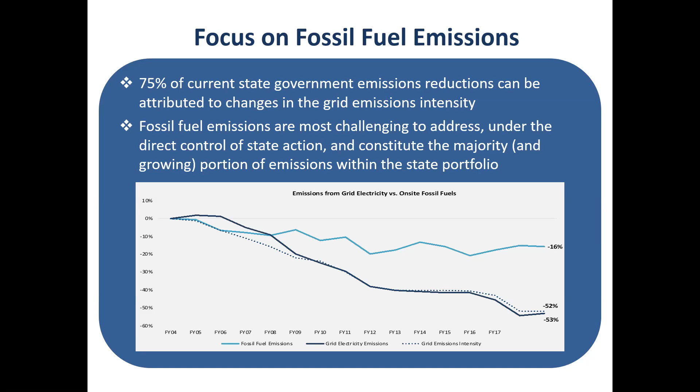And so this order really says what we need to focus on are the emissions that are the toughest, but also are the ones that we have directly under our control. This is the natural gas, the oil, the propane, the gasoline, the diesel that we use to fuel our power plants, our buildings, as well as our fleets. Next slide.

And so I think this is my last couple of slides. So we recognize and acknowledge that reducing emissions and meeting the targets that we have set are challenging for state facilities. We know that our state buildings are often situated in large facilities, often campus settings with central power plants, with fairly large and complex distribution systems. Many of our facilities operate 24/7. We have building ages even on the same campuses that are variable. Some of them built recently, some of them are 100 years old.

And we also know that in part because of DCAM action, a lot of the equipment that is now in place heating our campuses and our facilities is actually relatively new. We did a lot of work over the last 10, 15 years to bring that equipment up to snuff. And so we recognize that it's not the most cost-effective strategy to turn around and replace that equipment yet again.

Similarly, on the vehicle side, we know that our fleets are comprised primarily of pickup trucks and vans. We also know that often those vehicles are in our fleets for 8, 10, even 12 years. And so it's going to take some time to wait for those vehicles to be available as electric, as well as to then turn over the entire fleet. We also know that when we plan for things and incorporate long-term capital budgets into our programs and projects, there's a long-term horizon for this, several years at least, and oftentimes longer.

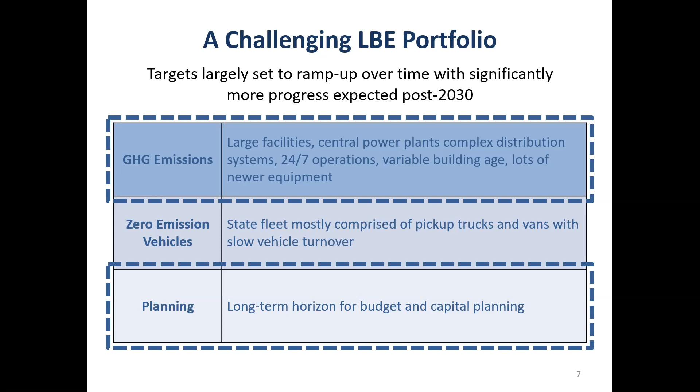Next slide. And I'll end here by just saying that we have been directed by the order, often in concert with DCAM, to develop guidelines and guidance documents for many of the sections in this order. We are working on those as we speak, and among the first set of guidelines that will be issued will be related to the new construction standard that we're going to talk about in a second. So stay tuned for those. There will be an opportunity for folks to look at those drafts and to provide some comments back to us on the guidelines that we are developing.

With that, I'm going to turn it over to Katie to launch into the Mass LEED Plus 2.0 standard for new construction. Take it away, Katie. Great, thanks, Eric. And as Eric mentioned, we are in the process of developing the guideline for this section. It's section 3 of the executive order.

So just to give you all a preview, those of you who are here today will get to see some of what we are working on in terms of that guideline document itself. We will be sharing that with all of our stakeholders, hopefully in the next couple of weeks, and would invite all of you to take a look at the guideline. Let us know if there are other questions or clarifications that would be helpful to include.

These guideline documents are a great tool for us to be able to update over time as new best practices, new technologies emerge. So we hope these will be really helpful, but also really dynamic and help guide the implementation of this new executive order. So I'm going to quickly recap what the requirements of the executive order state for both the new construction and existing building sections. And then specifically for the new construction, give you a sense of a little more detail and what we mean when we say things like eligible technologies. So Ryan, you can go ahead and go to the next slide.

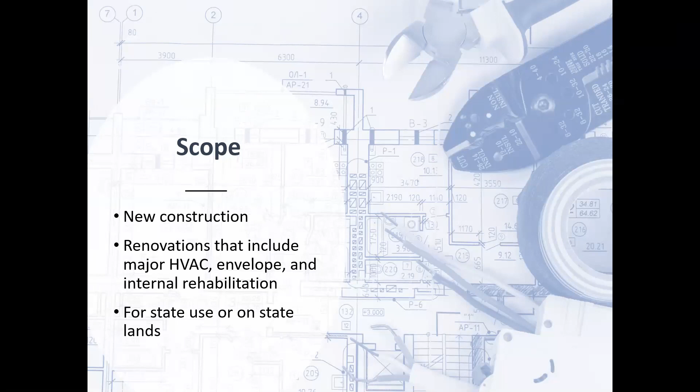So just a reminder that the Massachusetts LEED Plus 2.0 standard applies to both new construction and substantial renovation. We did work with DCAM to scope out what we meant by substantial, and that includes major HVAC, envelope, and internal rehabilitation. And also there's a caveat here that it's construction or renovation happening either for state use or located on state lands.

Next. So as the name would suggest, the previous new building standard did include LEED, and we have continued to keep LEED certification as a tenet of this new construction standard. There's now a minimum requirement to meet the silver level or higher. I think that will not be particularly challenging, as the majority of our state LEED buildings right now are gold or platinum. We recently had the 95th state LEED building added.

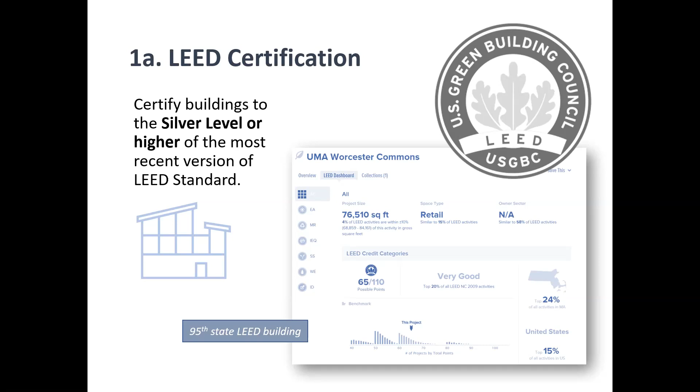We're doing a fun countdown to 100, but I think beyond the obvious energy-related accolades of LEED certification, there's a lot of value in a number of the non-energy prerequisites as well, including air quality and recycling. And so we felt that it was important to continue to use the LEED certification as part of the requirements for new construction. Next.

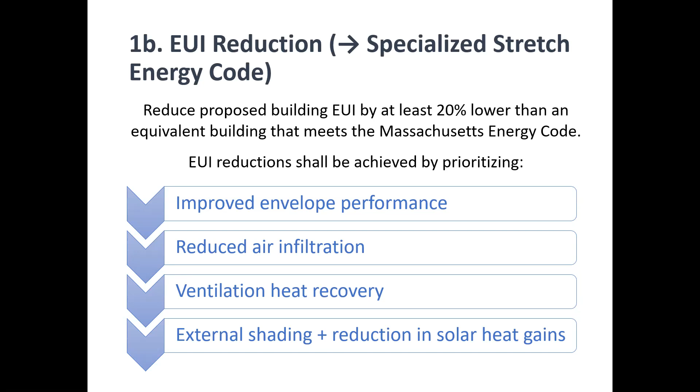So again, this is somewhat similar to the original Mass LEED Plus standard in that there is a requirement that building EUI be 20% better than the current energy code. There are some additional details that the EUI reduction should really focus on the building efficiency rather than strictly renewables. Because it's new construction, this is really the prime opportunity to address envelope and thermal related aspects.

So this is nothing new, but something that is new, Ryan, if you could click through, is the new 2021 climate bill that was signed in March does include a directive that DOER is going to develop a specialized stretch energy code. From our initial discussions with folks at DOER, it sounds like that energy code will have a similar metric to EUI, but really be focused on thermal efficiency of buildings. They will be promulgating that by the end of 2022. I think it's within 18 months of the signature date of that climate bill, and it will be an appendix to the Massachusetts Building Code.

So once that is promulgated, that specialized stretch energy code will replace this EUI requirement in the executive order. That is stated in the order itself. We will obviously update the guideline to reflect that change, but just wanted to let folks know that that's what's coming down the pike.

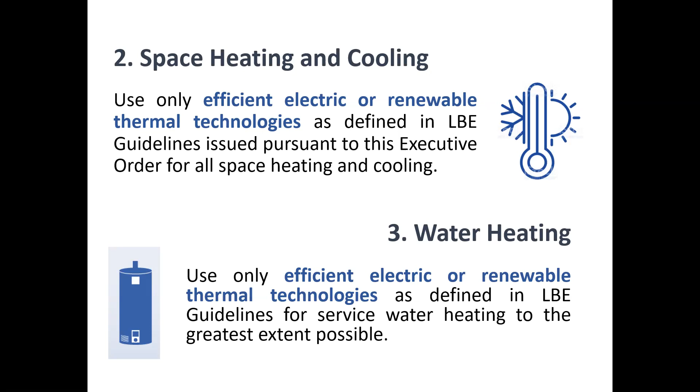Next slide. So as we know, some of the main systems in buildings that we want to focus on decarbonizing, especially in new construction when we have a prime opportunity to do so, relate to the space heating and cooling and water heating. There is language in the order stating that new construction and substantial renovations have to use efficient electric or renewable thermal technologies. And we've had continuous discussions with DCAM and others at DOER and have scoped out what we would like to propose. And Ryan, if you could click.

Right now, we are suggesting that prioritizing electrified or non-combustion solutions should be the primary objective, and that those equipment systems should meet the alternative energy portfolio standard specifications for that equipment. And then in cases where those technologies are not feasible for the project, there is an opportunity to seek other APS eligible technologies for renewable thermal, including woody biomass, biofuel, biogas, and compost heat exchange.

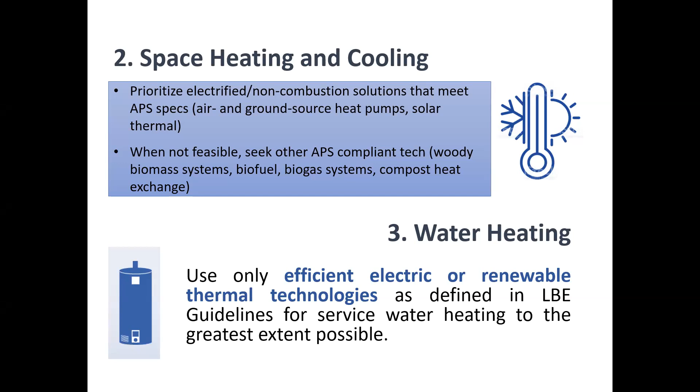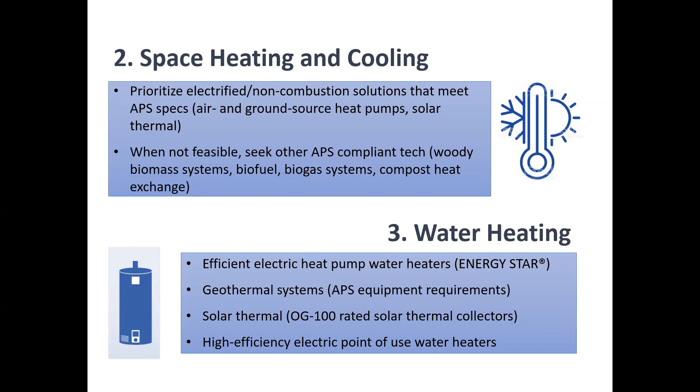For water heating systems in buildings, we are suggesting that for new construction, there either be incorporation of efficient electric heat pump water heaters, geothermal, solar thermal, and in certain cases where those centralized water heating systems are not applicable or appropriate, that the focus be put on high efficiency electric point of use water heaters. Next.

So EUI target setting, I think, is a really key focus area for DCAM and something that they have been working very closely on their projects to ensure that when a building is being designed, that there is a really aggressive EUI target that sort of represents best in class for that building type. So we've codified that in the executive order. And Ryan, if you could click, please.

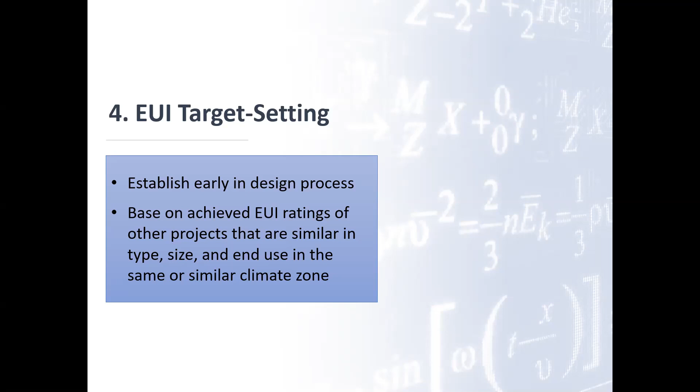One thing we've added to our draft guideline is that something like the EUI target should be set really early in the design process, and that EUI be based on projects that are very similar in terms of type, size, in the same climate zone, and that there be transparency about how that EUI target was calculated, just so that there is some sort of background information and sort of illustrating how informed that EUI target was.

Next. There is a continued focus on on-site renewables and maximizing those whenever possible. In cases where it's not possible, the executive order does state that projects can seek an exemption in that case, but that they must still design the building to be solar ready, which is fully defined in the Massachusetts Building Energy Code. It includes things like running conduit and ensuring that the building's electrical systems are going to be able to handle solar in the future. Ryan, if you could click, please.

So really the ideal timing for on-site renewables is going to be during or right after construction. We would recommend an emphasis on solar. It's sort of the best and most natural fit, particularly when you're doing parking areas and rooftops in these new buildings. It's the best time to really get the solar PV installed. As I said, when it's not fiscally or technically feasible for that project, at least seeking to design to be solar ready. And in addition, ensuring that state partners are aware of and adhere to the EPA best practices for making claims about that renewable energy.

Next. So climate resilience is an area of growing importance across the state portfolio. Both DCAM and the Executive Office of Energy and Environmental Affairs, as well as many other departments and agencies across state government, have really brought this to the forefront. It involves preparing the physical assets and energy systems to account for projected changes due to climate change and really position the Commonwealth to address those hazards and really reduce the risks.

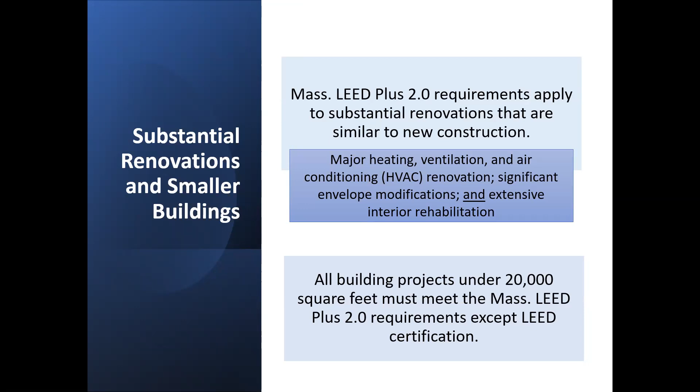Lastly, there is a provision in the Mass LEED Plus 2.0 standard that qualifies these standards as also applicable to substantial renovations. Recapping how we've tentatively defined that with DCAM, projects under a certain size threshold, in this case 20,000 square feet, have to meet all of the requirements. They're not required to meet the LEED certification requirement, but it is still strongly recommended, and when possible should still be included as an aspiration as part of the project design process.

And then at the end, there are a number of additional directives as part of the standard. These are not requirements, but they're suggested best practices when possible.

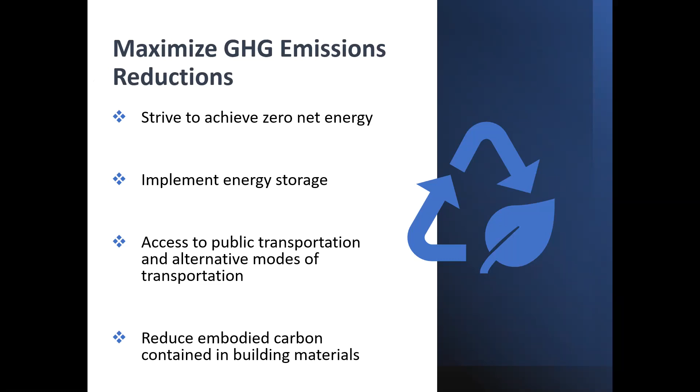Right now in the draft guideline document, we've created a few clarifying items and suggestions for what we mean by each of these additional directives when we're talking about zero net energy. It's important to note that as part of that specialized stretch energy code that will be developed and promulgated by DOER, they will be defining a zero net energy building per the Massachusetts Building Code. So we will be updating our guideline to reflect that definition, but we want to be transparent about the renewable energy attributes and claims that can be made. I think the underlying spirit of zero net energy is to optimize the efficiency of the building while also maximizing the energy from renewable resources. So that's really what we mean here. It's not necessarily striving to achieve a specific certification. It's really more the underlying premise of the zero net energy concept.

When it comes to energy storage, I think it's often a very natural pairing with renewable generation, given the number of incentive programs right now, and as the grid gets greener and greener, there's going to be a bigger need for battery energy storage to help offset some of those peaks. So when it makes sense for the site, we would encourage implementation of energy storage.

As part of the site selection process, if that is something applicable for a project, considering things like access to public transportation and other modes of transportation, whether that's biking or pedestrians, should be a key part of evaluating the site.

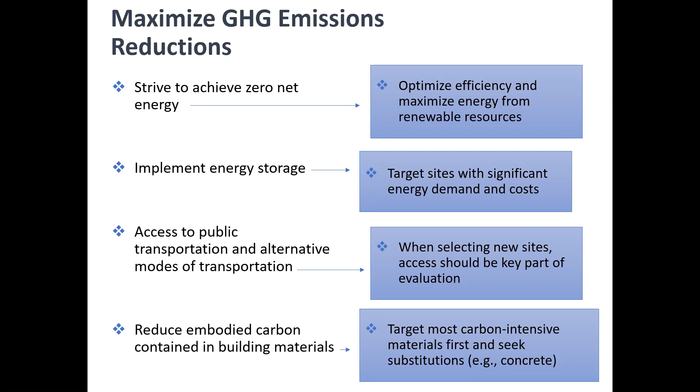Lastly, this is an area that DOER will be exploring further. Per the executive order, we have a directive to conduct a study to do a deeper dive on this, but seeking to reduce embodied carbon in building materials whenever possible. We have some initial technologies out there right now, and when possible, those should be included in projects, but more to come on that in the future.

Now we'll talk a little bit about existing buildings. This is not a section that we have really done a deeper dive in developing guidance for, so this is really going to be more a summary of the requirements that exist in the order, with the exception of biofuels. When we get there, I will pause, and you'll see that little blue box again to indicate that's the preliminary guidance we're going to put forth for your comments.

There are a number of directives, and this is one of the primary focus points of the existing building section, which is section 4 of the executive order: when planning or doing projects that affect energy use, it's really taking the overarching objectives and goals of this executive order into great consideration. So either reducing or eliminating on-site fossil fuel combustion, optimizing building performance, monitoring building energy performance over time to ensure those buildings are continuing to meet their original objectives, installing the highest efficiency equipment possible, and incorporating energy performance into leasing decisions as well, since we know it's not the vast majority of state square footage, but it is still a piece of it.

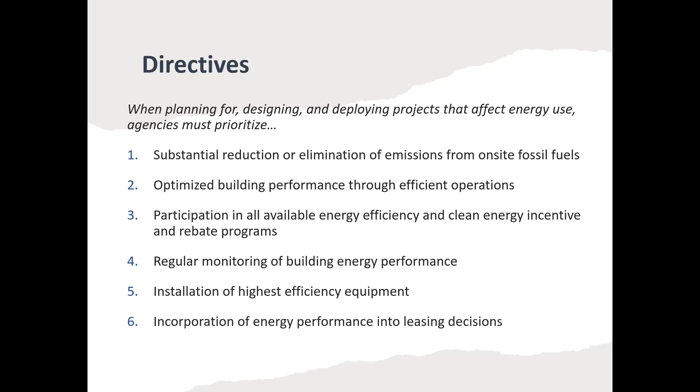So planning—I'll let Sarah speak to some of this in more detail, because really this is DCAM's bailiwick. Utilizing the energy data, we have quite a wealth of it at this point, and as the CEI real-time metering program continues to roll out and expand, we will have more and more data at our fingertips, which is great, and we're always finding new ways to analyze and leverage that to inform projects in progress.

As we said, including things like greenhouse gas emission reductions, decarbonization, clean energy in all types of equipment replacement and capital and master planning. Lastly, DCAM, per the executive order, is directed to conduct periodic analyses, some on a 5-year timetable, some on a 10-year timetable, just to assess where in the portfolio emissions are still in need of extra support and how we can drive that down.

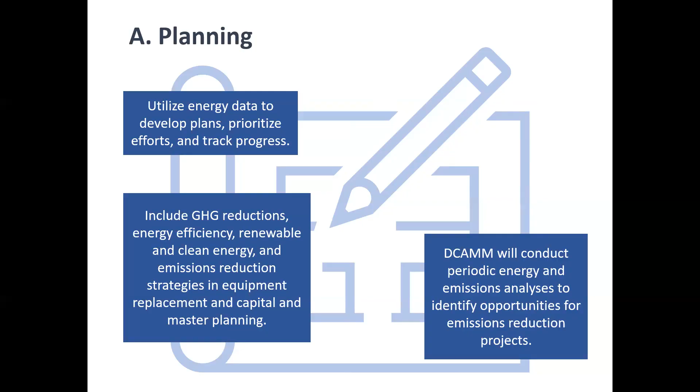Renovations and comprehensive energy projects is a similar theme here, encompassing the spirit of really seeking to decarbonize whenever possible. As Eric spoke to earlier, the existing building portfolio is really in need of attention to meet these 2025 through 2050 goals, seeking out envelope improvements, reducing EUI, increasing the amount of renewable energy and energy storage, and maximizing resiliency. These are all going to be continually important aspects of our building portfolio. The order is weaving all of this into various aspects of our existing building activity.

In terms of operations, we will continue to track energy performance and seek to reduce building energy use through operational efficiencies. Similar to what the previous order did, there's a directive to continue to provide training and professional development, and that is something that DCAMM and MAFMA already do to a great degree and very effectively. This executive order just codifies the great work that's already happening and enables them to continue it going forward.

Heating oil, as Eric alluded to—this is one where there's an effective date of July 1st, so there will be a guideline document on heating oil as well, coming out around the same time as that new construction guideline. We will be accepting comments. Basically, for sites using heating oil, there's going to be a new B10 biofuel blend minimum requirement. The B100 portion of that fuel must meet the APS requirements. We'll have more details and information in the guideline, and would love to get your feedback on this, particularly those of you that still have some measure of heating oil use at your sites, just to make sure the information and guidance we're providing is helpful and helps you address any questions you might get.

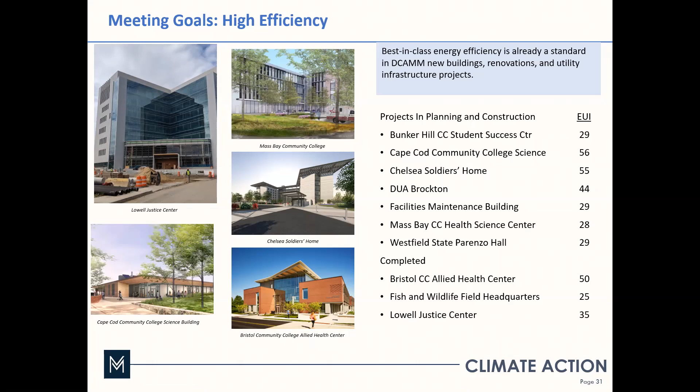What we find is that some of the national data sets aren't that useful because they include older buildings which aren't as aggressive. A caution, if anybody on the call is not working with DCAMM, in particular, the baselines for the AIA 2030 targets are much higher, some of which don't meet mass energy codes, so a little caution there.

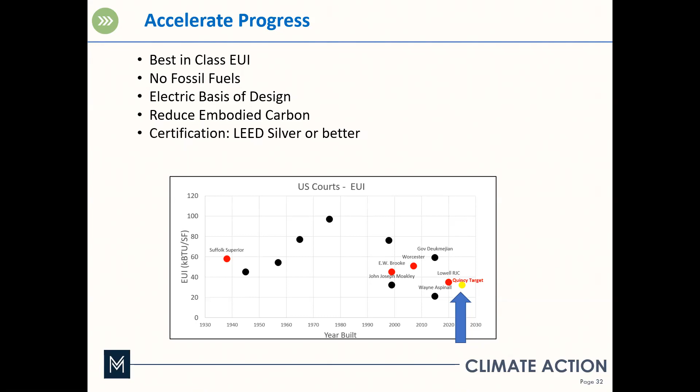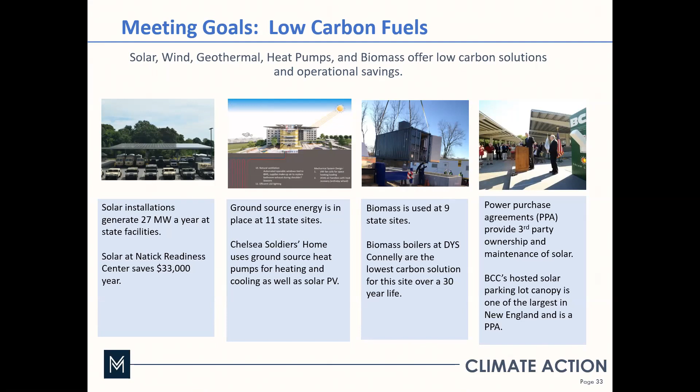Here are some of our projects where we've used low carbon fuels, with a caution: Natick Readiness Center generates solar energy but sells the renewable energy attributes, at a savings to the facility. Chelsea's Soldiers Home uses ground source heat pumps and will host solar PV. There's biomass at 9 state sites, with a new biomass boiler at DYS Connelly. The power purchase agreement for hosted solar at Bristol Community College is one of the largest solar parking lot canopies in New England. All of these have offered low carbon solutions to the region and operational savings to the agency.

Of course, existing buildings is the real challenge - I mean, it's all challenging, right? But existing buildings is really a challenge, and the order is more directive than the prior order in this area. In particular, two areas: we'll be asked to have our teams evaluate the building envelope and upgrade it where feasible, in addition to targeting a low energy use intensity, but also to evaluate low carbon solutions for heating, ventilation, and air conditioning.

Now, evaluating the envelope - the rationale here is simple. The envelope is a driver of energy efficiency, and if we're going to change out our HVAC systems to be low carbon, the smaller we can make them, the better, in terms of load. They are less expensive to build and to operate.

In terms of evaluating low carbon HVAC, that has to happen really early in any project, and we'll be pushing our teams. An aside is that as we're moving to incorporate this into our RFPs, as well as our new house doctor relationships, we're meeting with house doctors to talk with them about this expectation. It's been implied throughout Eric's and Casey, Katie's comments,

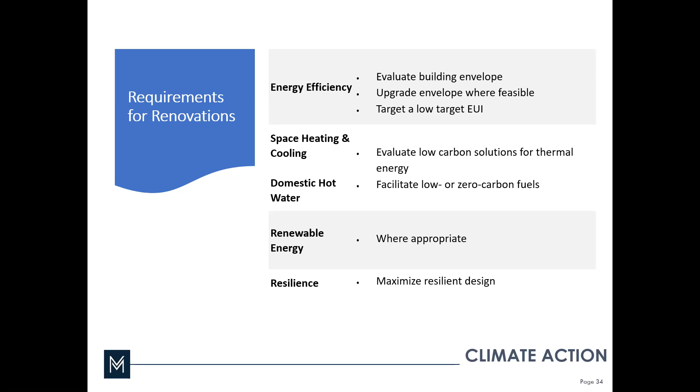but bears repeating that one of the assumptions we're all operating under is that the electric grid in the region has been getting cleaner for sure, and will continue to get cleaner and lower carbon. So we're going to be moving largely to electrification.

Many of you on this call know that there are a number of decarbonization studies that are either almost complete or in process at the UMass facilities, as well as the Salem State North Campus, and an integration of a decarbonization plan with the master plan at Mass Maritime. The executive order does have planning requirements, as Katie mentioned. And at DCAMM, we're looking to include decarbonization into master plans, facility conditions assessments, and critical infrastructure planning.

And the results of all of these studies show that we need to move to a low temperature water distribution, which largely accommodates heat pump technology. And then to do that successfully, we need to make our buildings ready with higher efficiency, appropriate heat delivery and air conditioning delivery equipment, and then to transition to electric infrastructure. And we're also looking to think about how do we future-proof our facilities, even if we can't fully undertake the decarbonization in a given project.

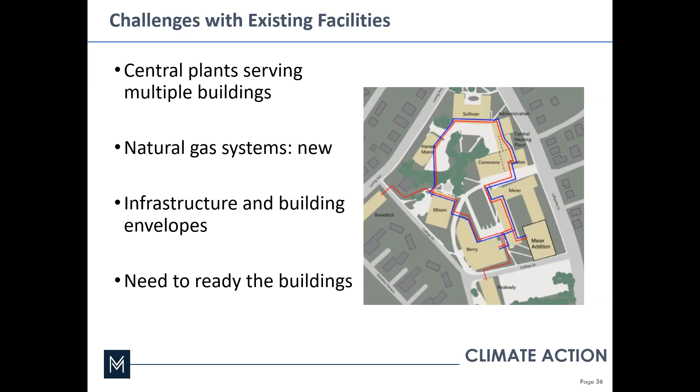Okay, turn it back to you, Katie or Eric. All right, so I think it's just back to me quickly.

Just a couple of closing thoughts, and then we want to leave time for questions, clarifications, or other points that folks want to make. The next couple of slides are just our initial thoughts on helping folks to think about how do we get off our chairs and start thinking about this now, while these longer planning efforts for full decarbonization are taking place in a longer time frame. So let's go to the next slide.

So I think we want to just start by reminding folks that the reason we have such a big focus on buildings in this executive order is some of the data here that shows that buildings comprise well over 3/4, 85% actually, of the state's emissions that come from fossil fuels. So that means obviously that if we're going to achieve these goals in any measure, we have to be looking at our building portfolio and the building sector within the state system.

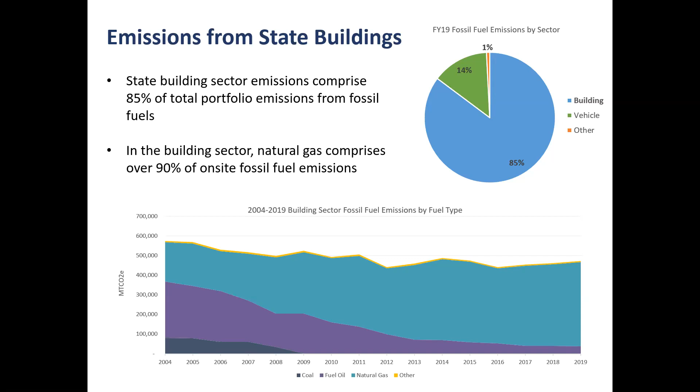Additionally, as Sarah mentioned, there has been a huge effort to transition to natural gas as what we used to call the transition fuel a number of years ago. And so when we look at our on-site fossil fuel emissions in the building sector, 90% of those are coming from natural gas. So when you hear efforts at DCAMM and in other places focusing on converting away from natural gas in our building sectors used for heating, this is exactly why the conversation almost immediately goes to that fuel and to this sector.

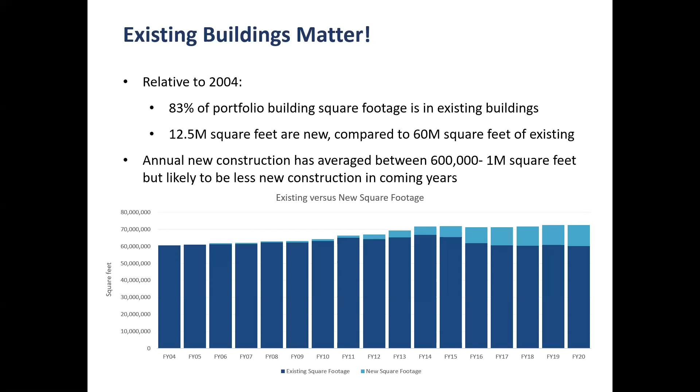We also recognize that a lot of the new construction that's happened over the last number of years is likely to slow down as the state focuses on managing and taking care of its existing square footage, and puts a bit of a hold on new construction, although there definitely are some new buildings coming online. But we certainly don't think that this will happen at the same pace over the next 10, 15, 20 years.

And so again, here's some thoughts. There's no magic bullet to this. And so we want to help folks think about this in a way that doesn't overwhelm you from the get-go, because this can be overwhelming when we talk about achieving the goals that we want to achieve. So first, we just want to remind folks that decarbonization is not happening all at once. It is something that is going to take time. It's going to take all of us working together. It's going to take planning. It's going to take budgets.

It's going to take adoption of new technology. So this is a process, and we just need to acknowledge and accept that this will take time.

The second thing we want to encourage people to think about is, even though you may not be able to see the opportunity to get rid of fossil fuels tomorrow or next week or next year, what we want to encourage you to think about is to not do the opposite, right? So we call this sort of do no harm. We're kind of stealing from the medical profession.

And what we're saying here is, even though we can't necessarily see a clear pathway immediately to getting rid of fossil fuels, what we don't want to do is increase the amount of fossil fuels that we're burning at our site. So if we're building new buildings, if we're doing additions, if we're renovating, what we want to avoid at a minimum is creating new dependence for decades to come on fossil fuels. And so we want to avoid that at all costs.

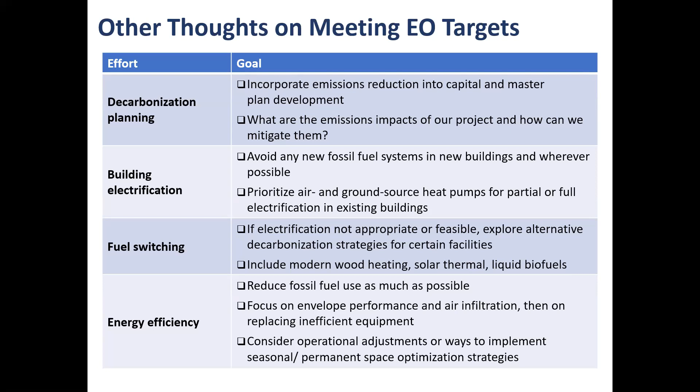So with that, I'm going to stop, and we can probably stop sharing the slides and open it up for additional thoughts, questions, comments.